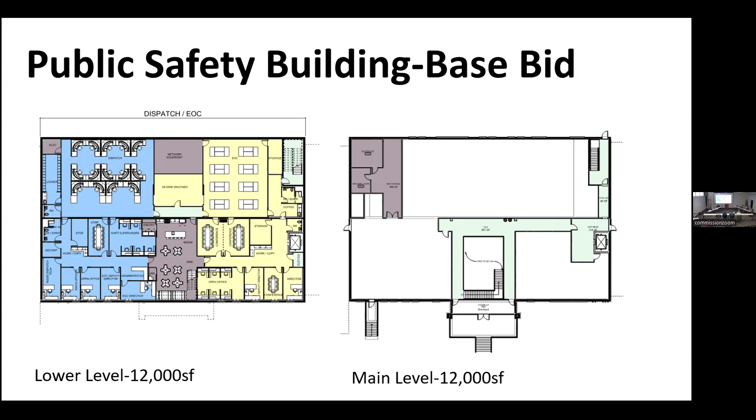And then these next images start to show what our alternate consists of, which is what they're bidding right now. So our base bid's in the middle, and then we have these alternate pieces on both sides, kind of like bookends, if you will. And if the alternate's accepted, then we'll be able to build out the full shell space. We'll have a lobby for the public to come and we can greet them and move them to those spaces that are finished.

We also have some storage areas in the back on the left side. Some vehicles, I know right now you guys are renting some space for vehicles, will actually be housed out here. And we will move property and evidence out here as well, which will move from the existing JLEC building, which makes the most sense. Once this building is built out, everything needs to be out here anyway.

You mentioned the storage. Is that the light green? Is that evidence storage that's currently at the JLEC? Yes, there's kind of two greens there, a turquoise. And that's operable storage shelving, and that's where they process. They also have pass-through lockers there as well to maintain their chain of custody.

I think it's important to note, just to put a little nuance on that, Chris: there'll be some small evidence storage for court proceedings that remains at the Judicial and Law Enforcement Center once this is fully built out as well. The sheriff's courtroom security folks will be retained at the Judicial and Law Enforcement building, which I want to start just calling the courthouse. And then I work in the historic courthouse. So there'll be some smaller footprints for those in that building.

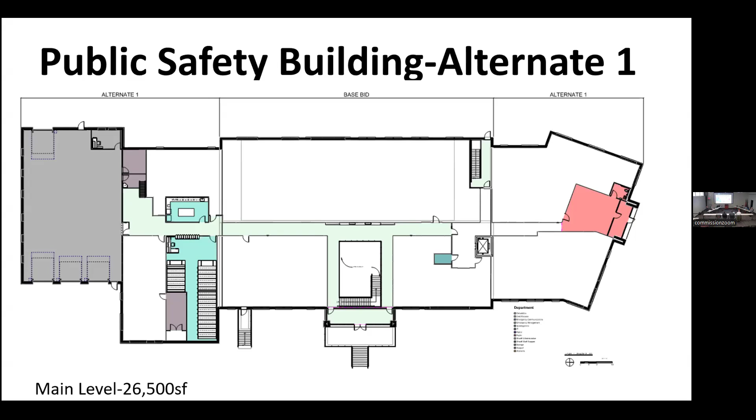Okay, so this is something that we're not bidding fully built out at all, but I wanted to show it to you so you at least could see kind of what it looks like. The sheriff operations are in the middle and administration's on the right side, and then full build out of evidence, and there's a locker room and training area along with that vehicle storage on the end. So in a perfect world, if we weren't worried as much about budgets as we all know we have to be, this would be the full build out of what that space looks like above, with the dispatch and EOC below it.

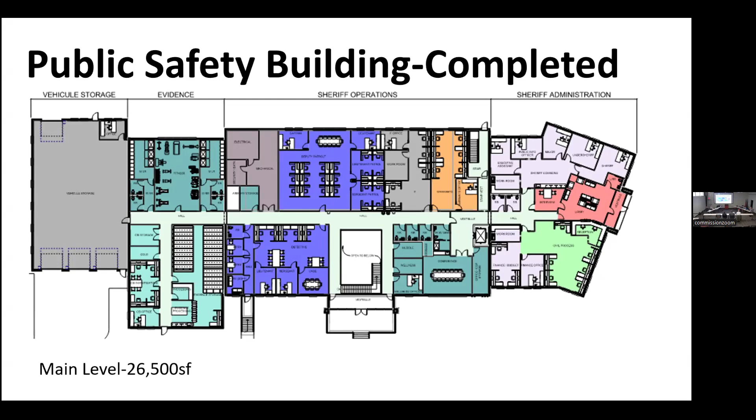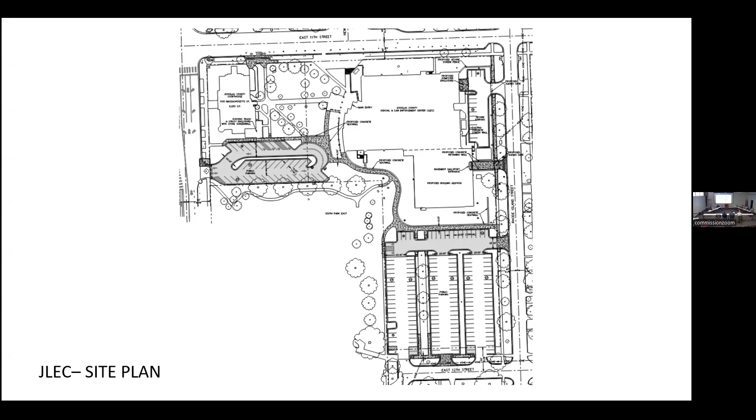JLEC, just for a reminder, not as extensive an explanation because the alternates aren't quite as great. So this is the site plan. Nothing has really changed. The additions on the south side of the existing building. There are a couple of parking improvements and things that we're showing in these site plans, and we'll talk about those in the alternates as well.

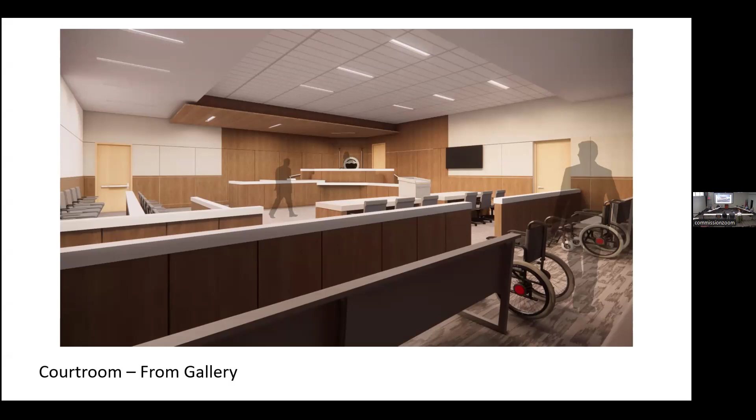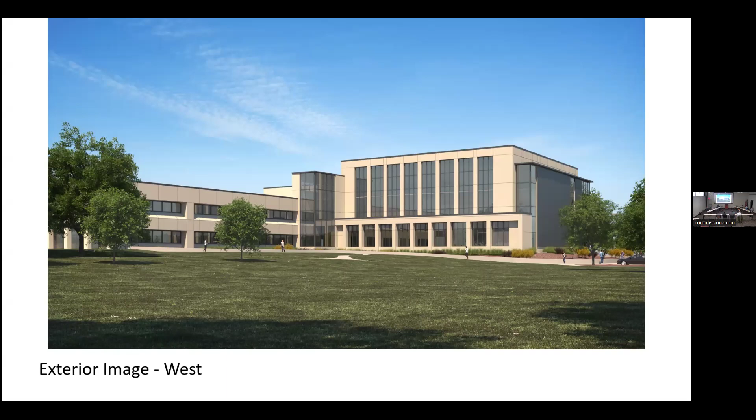Okay, Tim. All right, thanks, Chris.

As Chris has been finishing the design, we over the last month have been really excited to get this out to the public, and I'm happy to share we have great news on interest in the market for the project. That's the best way to drive value for every dollar: get a lot of bidders involved to drive value into the project.

So currently we've received those bids and we are shaking out the bids, or vetting them, making sure we have apples to apples, that we've bought the different scopes we intended to. That's taking place over the next week or two, right after Thanksgiving. We'll finish that up and put together the GMP, guaranteed maximum price, review that with the county, and come back to present it on the 11th.

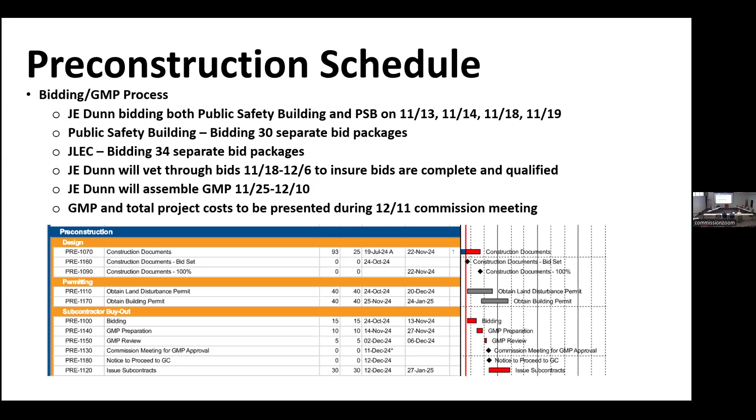After the GMP is approved, we're still on the similar construction timeframe we've been talking about before. Starting the JLEC, the courthouse addition tower, in January, this coming January. That tower will complete summer of 26, about an 18-month project. After the tower is completed, we'll start the renovation of the existing JLEC for a year, completing a year later, summer of 27.

While the tower is being built at the courthouse, similar timeframe for building the public safety building, spring of 25 through spring of 26. So the goal is to complete the new construction of both the public safety building and the new courthouse, so occupants can move out of the JLEC into the new spaces, and then we start renovating the floors one by one in a sequence we're working with the county on.

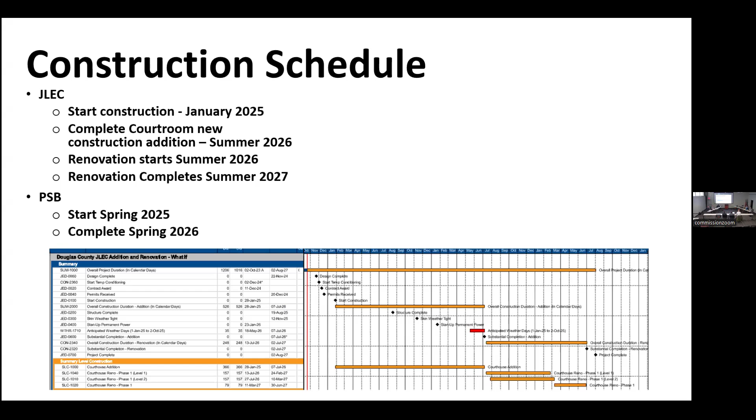At this point, I think we'd like to talk through the alternates that we bid. When we went out to bid, the base bid is the base scope, the scope we know based on all our discussions that we're going to bid. But to allow flexibility as budget allows or as bids come in different, we proposed different alternates, and each of the bidders bid those alternates for each building. Chris will talk through those.

This also allows us to control how much money we're spending at bid day. So if we're over or under a little bit, it gives us opportunities to take advantage of all that bidding and competitiveness, and apply it to some other improvements—some are deduct alternates, things we might not necessarily need but would like to have, and we think eventually it would help out all the people working in these spaces.

I'll read through these, though I don't need to read them all if you don't want me to, but a lot of them are parking lots. We'll start at the top. JLEC alternate one is the parking lot renovation and readjustment, because we're going to be short spaces. After we put this addition on, we're going to lose some of our spaces we have today, and hopefully this will help alleviate some of that. Commissioners, this is the parking lot south of the historic courthouse now.

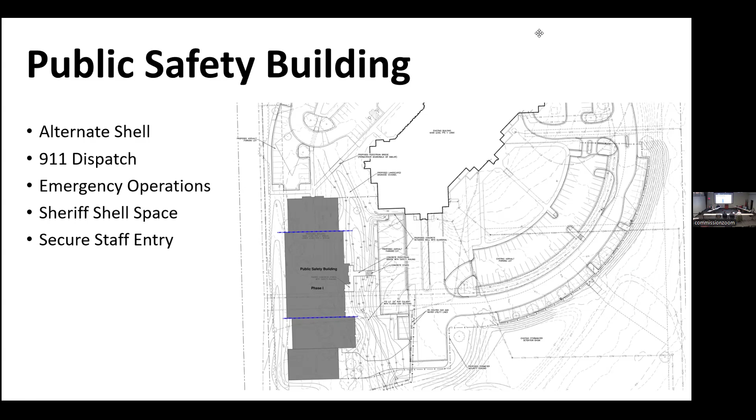So, commissioners, if there are no other questions or thoughts at this time, we will recess until our 5:30 business meeting. Thank you all for being here.